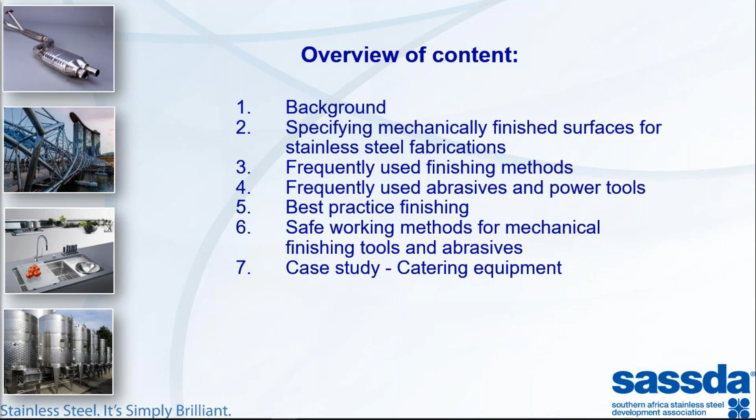What we see when we look at stainless steel is just a function of the light frequencies reflected back from the surface. This means the light source, whether it's the sun, your LED light, or candle, is important. The surface size matters too—there's a vast difference between a full sheet in the sun compared to the same surface finish on a business card size under electric light. And then also the surface condition of the material. Those three things are the key factors.

When we look at customer specification, usually in the title block of the drawing there's fine print specifying some sort of RA surface roughness figure. But this alone is not sufficient to fully specify the mechanical finish on stainless steel. The RA values might be the same, but the visual effect might be different. And in practicality, how many fabricators have the ability to measure RA values, and how many of those specifying it can actually measure it when they receive it?

When the aim is to precisely match the specified finish to what you can deliver, the best approach is to use comparative surface finish samples or swatch samples. This is important—a visual benchmark. So what you do is figure out what surface finish is required, give it your best effort that you know you can repeat in your fabrication setup, and then get approval from your customer. Once that approval is there, either side can have a sample of this finish that they use in the quality departments. It saves a lot of headaches.

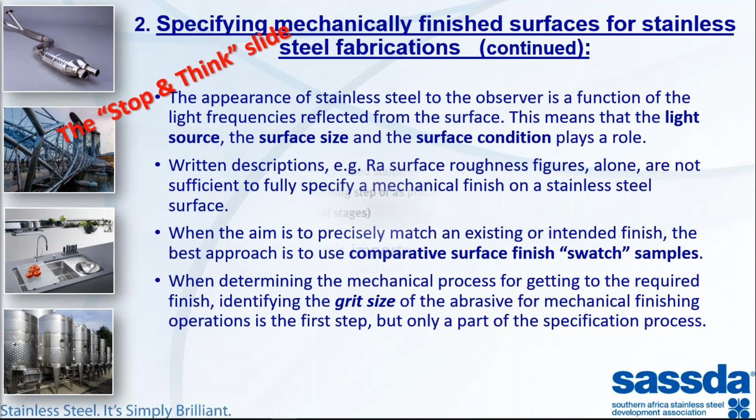When we talk about grit size and specifications, these are normally the grit sizes we work at for different processes. Removal of weld seams is around 40 grit. For hot rolled material, 1D finish with that orange peel effect, we also start around 40 and move up to 60 grit. Cold rolled material can start at 120 grit, or down to 80 if needed. As you go through finishing steps towards a final, very fine finish, you use 120 up to 240 grit, and final polishing stages go up to 400, even in some cases up to 600 grit. So the choice of grade of material is also important when you want a very smooth or highly reflected polished finish.

The chemical composition is important here, especially on tubular products. Many of these grades are alloyed with some titanium, like grade 321 and 316Ti. This gives the material excellent resistance to intergranular corrosion, but when you finish it to a high degree, it leaves a streaky or uneven look to it. You learn that quickly once you've tried to do a finish—I think a lot of people have burnt their fingers that way listening today.

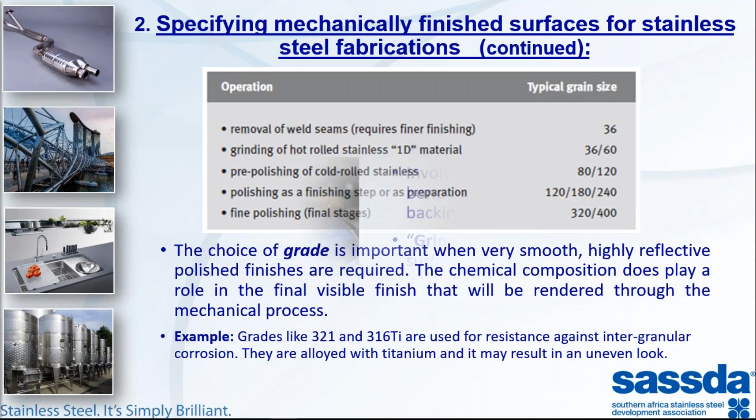Okay, so let us look at the finishing methods. Let's kick off with grinding and polishing. This is a mechanical method of removing layers of material from the surface with an abrading action. It involves hard particles glued or bonded on a backing, which then moves at speed and at specific pressure to remove the upper surfaces of the material. Grinding usually refers to the removal of surface finish, such as weld seams and oxide layers, and is in most cases regarded as the more aggressive removal. Polishing is more for decorative work, where the surface is also intentionally removed, but less aggressively so.

Now, after we've got that nice polished finish, we can shine it up even more by buffing. Buffing is not a process intended to deliberately remove material from the surface, but rather a smoothing process, just making the material more bright. You'll know it well—the cloth wheels used as indicated in the picture. The process can involve the use of pastes, liquids, and even solid buffing compounds of different abrasive values—we also call them soaps. That's rubbed or applied to the cloth wheel, and then it enhances the finish.

The fine finish produced is dependent on the pre-buffing stage, so you can't just take the buff wheel and put it on mill finish or hot rolled mill finish—it will only shine the dimples up, basically. Buffing can be done in single stages or multiple stages, with different grit sizes, and it's usually done in stages where the direction of each stage differs from the previous. We'll look at that later. This is a type of finish usually used by pharmaceutical companies—that type of specification, and some architectural products.

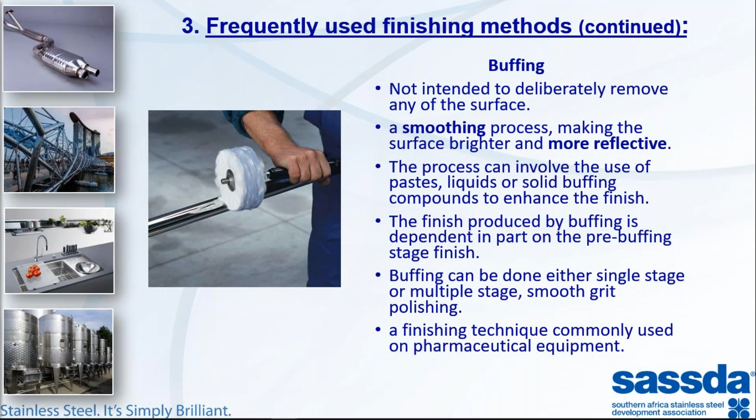Brushing is sometimes confused with polishing, but they're different things. Polishing is removing material, less aggressively than grinding. Brushing is not intended to do that, but it's also an abrasive finishing process.

Milder abrasives are usually used to only texture the material, changing the surface conditions so that light is deflected or reflected in a different way. Typically this will be a brush finish as indicated on the picture, using wire brushes and Scotch-Brite items, belts, pads, and wheels.

It's very important to use representative surface finish samples when specifying brush finishes. Your wire brushing might not look like mine, so we need to negotiate this and make sure we've got visual aids to assist us when doing the job.

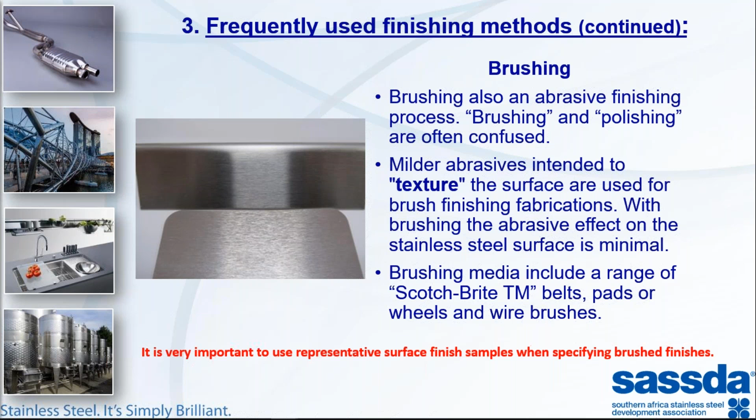What's important when we talk about the final appearance and quality of the surface? I'd say surface quality is more important than appearance, but the two go hand in hand. It's dependent on your abrasive type. Your backing material is very important because that gives you flexibility, removal of heat, and so on. Your grit size, shape, and hardness is important.

Then also the number of finishing steps - like I've mentioned, you can't go from a 2B to a mirror finish in one go. Then also the equipment and its power supply - we'll talk about the power supply just now.

And how the abrasive is supported, coming back to the backing type - if it's a belt or disc, what is the flexibility? Then, and this is where the operator's skill comes in, there's surface speed and applied pressure. We need to control both of these very carefully to have optimum lifespan of our equipment and abrasives, as well as getting efficiently to the required surface finish.

The optimum choice of finishing equipment, consumables, and method will depend on the existing surface finish. If it's really close to the final finish, you'll go for faster equipment, less pressure, finer grit sizes, etc. The accessibility of the areas is important, especially with your tooling, and then what the final visual effect must be.

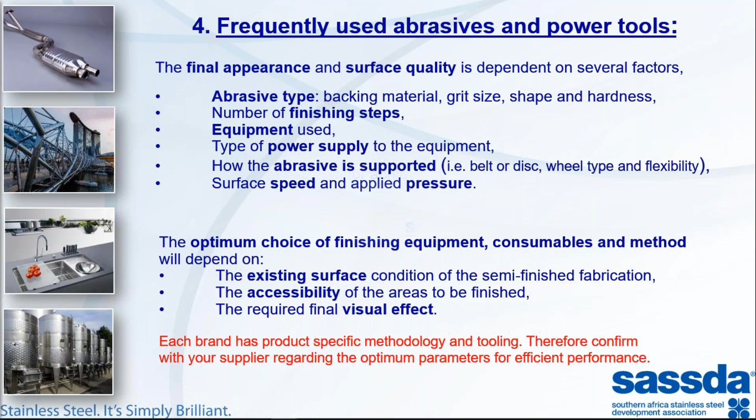If we look at some of the equipment and consumables we use, there's the abrasive belts - we all know them, different sizes, widths, grit sizes, backings, and you can even get them custom-made to suit your equipment. This is a very handy thing in your workshop.

Another abrasive, not as aggressive as the abrasive belts, is your Scotch-Brite and similar product range. We use this especially for blending in material. You can also get them in belts and wheels, but we use them a lot in manual operations in pad form. They're not graded in terms of grit - they're just called coarse, medium, fine, very fine, super fine.

This is the standard workhorse in our industry - the flap discs. This is usually used in the initial stages where you want high volumes of surface material removed. These things are a bit aggressive and they can bite.

For finer operations, you'll use the fiber discs, also known as sanding discs, or here in the Boland as papiertjies. It's less aggressive than flap discs and less prone to undercutting, but when you need to remove material, this is not as cost effective as the flap discs.

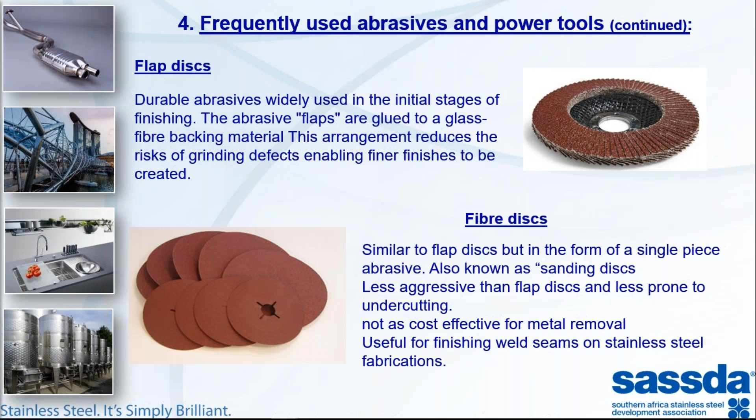There's also the unitized wheels. This is a Scotch-Brite looking type material, a nylon type of bonded material. We put it on mobile or portable machines, and you get them in various diameters, densities and flexibilities. These things last pretty long, and they're able to give you a uniform finish from the first action right until the consumable is finished.

It's especially popular where you've got long welds where you just quickly want to strip clean your welds and the heat-tinted metal. Convolute wheels, very similar to this, but formed by wrapping layers of abrasive around a hard core to make up a wheel. These things are less flexible, but also less aggressive. So for both of them, because they've got a small contact surface, please be careful with your speeds and pressures that you apply.

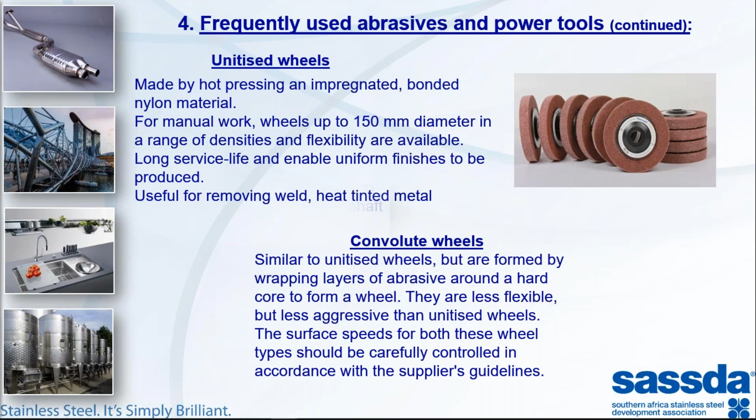We will have a look at some of the popular tools, and the first lot is the fixed tools. On this combination picture, you will see the old workhorse there in the middle, the fixed belt grinder, suitable for deburring things and sharpening drill bits and all kinds of general work.

There's the flexi polisher. It looks like a Dremel tool on steroids there at the front, at the bottom. So it's a fixed machine, but it's got a flexible shaft, and you can do quite arduous in-shop polishing work with it.

Then on the right, there's the long spindle buffing mills. There you can put on there anything from a stone to a grinding stone to cloth wheels. Also, you will find one of these things in all stainless steel shops. Then you will also see where they do a lot of tubing, the tube notching machine, and it's used to prepare joints for pipe intersections, etc.

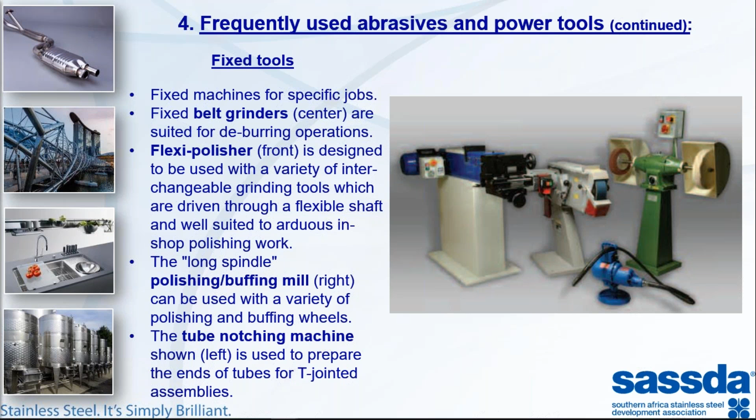This is where we get to the portable tools, and these things are the workhorses of the industry. So the first one you see is a portable grinder. You don't see them that often, but they're multi-purpose tools and you can use them on plate as well as tube. You can put all kinds of easy to change abrasives on there.

That one has got Scotch-Brite on, but you can even put an inflatable wheel to give you different hardnesses and flexibility of your abrasives. Keeping the speed down on this guy because it's quite aggressive, can avoid excessive heating. You see it's quite wide as well, and it will limit surface damage. So your pressure and your speed should be in good balance, but low speeds.

You get the old angle grinder. This is a very popular tool, DIY and in industry, and you know how they work. They work on flexible abrasive discs. Usually these things are very versatile with all kinds of things that can be fitted to it, and it's good for both grinding and polishing.

This is a handy tool, also not that often that you see them. The internal angle finishing tool for cabinets and things like that to remove weld marks. So this is a very thin disc, and it's also versatile for grinding and polishing.

Tube polisher, this is a very efficient tool, and the main feature is that it's got a belt that is mounted on flexible wheels, or the physical mounting is flexible, so that you're able to wrap the abrasive close to 270 degrees around your tube. So for blending in and finishing off tubes, very, very efficient.

Very similar to that is the power file, so it's just narrow. It's a pneumatic tool, and it's good for deburring and grinding off weld seams, but it can give uneven surfaces. It's fairly aggressive. It bites.

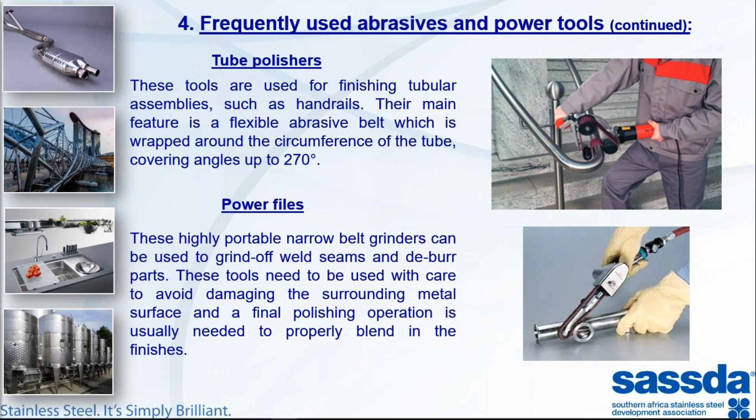The drawback on the pneumatics is the higher energy cost. Obviously, you will have to fork out some money to get your compressors and your air lines in, and then your tooling is also a bit more expensive, and then you sit with very high noise levels. But they're efficient. The electrical or stationary machines, the fixed ones with flexible shafts, the limited shaft length can reduce your accessibility, and then a high level of operator skill is also needed here, and we don't always have that.

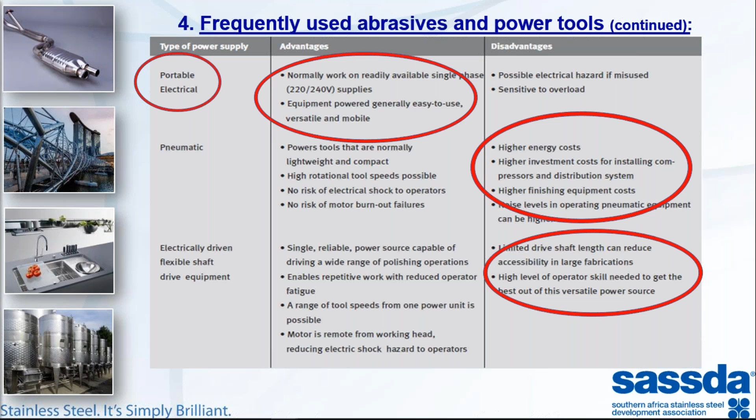Okay, so now we get to the stainless steel part of things. Best practices when we work with stainless steel. Now, the best way of saving cost and time in your finishing department is by minimizing the finishing. So it's important to purchase material that's in a good condition and as close to that final finish as you can get it. So it's usually very good to negotiate with your supplier or with your customer to accept the standard mill finish.

Protect these high value finished components throughout all stages of manufacture and storage. This is where one of those courses of ours, the shop floor courses, can assist your storage and your storeroom people. Then also the correct welding procedures and equipment is important.

When it comes to high quality finishes, the TIG welding method is unbeatable. But remember, TIG welding is slower than MIG or stick. So you might save on the polishing, but you will spend more time on the welding. Once again, it's a cost decision you've got to make, how you will balance it.

And then obviously avoid excessively thick weld seams. Not only is it going to take long welding those things, but it's obsolete material that needs to be removed.

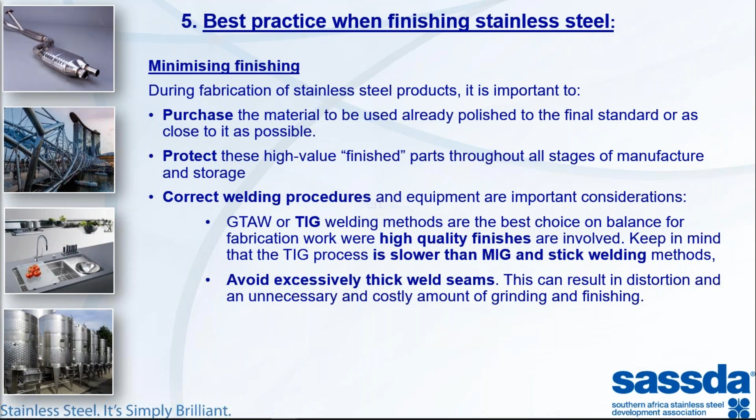A bit of an example of how we can select finishing methods appropriate to the design, or the other way around, design to fit or to make it easier to finish. On the left, we've got what's called a soft tube joint, where we use a standard preformed elbow that we cut at the right angle, and then only two straight joints are needed. It's good access for both welding and finishing.

On the right, there's the miter joint. It's a sharp angle, and therefore your accessibility to the inside for welding and cleaning off is restricted. In both cases, you will finish it off manually with a Scotch-Brite type of consumable.

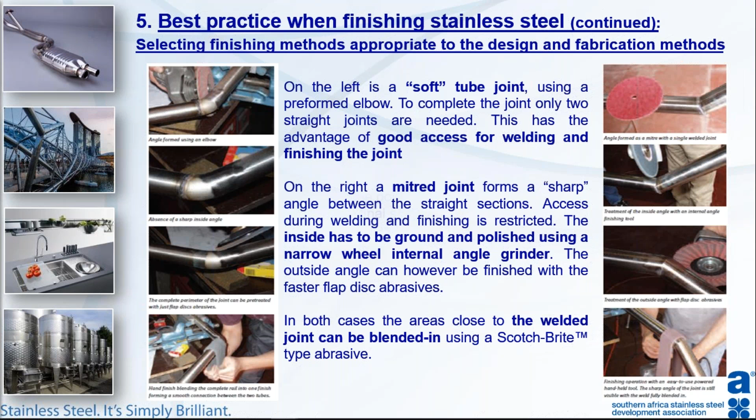Okay, so for industrial finishes, it's usually the weld areas and so on that get finished, and corners get deburred. But when we are talking about decorative finishes or hygienic finishes, some precautions must be kept in mind.

You must keep your surface dressing to a minimum. Every little nick or bump or heat distortion will reflect the light in a different way, and it will always be visible whether you polish it or not. Avoid localized heating. Work with the existing polish, grit and direction that's on your material as you buy it. So keep your heat input as low as possible, not only in your welding process, but also in your finishing process. Once again, a function of speed and pressure.

Increasing your tool speed and pressure will get the job done quicker, but you will have a high turnaround in tools, and your cost in consumables will escalate. And when you change your grit sizes, from 180 grit to 240 or whatever might be the case, clean off the workpiece, blow it out with air equipment to make sure all those large grit particles are gone. When you blend it in, keep the same polish direction all the time through all the stages. And when you do the hand polishing, use a long stroke in the final stages.

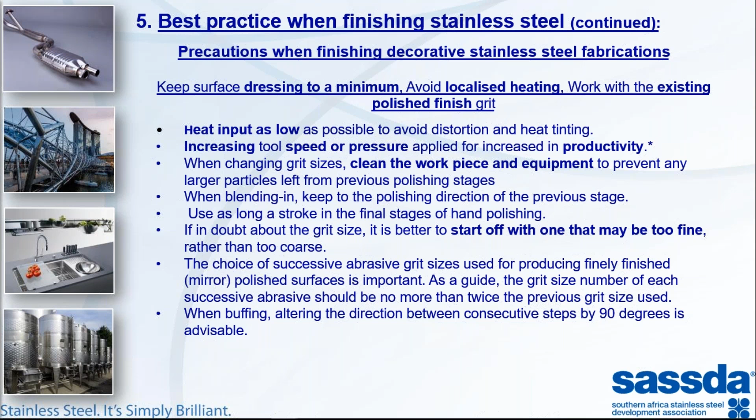So, like in any stainless steel shop, whether it's industrial, architectural, or for high-spec industry, good housekeeping during storage, fabrication, finishing, and installation is extremely important. The laser film, that PVC coating on your sheet metal to protect the surfaces, is important. Keep those coatings on as long as possible.

Try and get your tubular deliveries, your square tubing, your pipes and so on, in plastic sleeves. Please do not, and it's such a simple thing but we still see it quite often, keep your abrasives segregated. Do not mix abrasives used on mild steel at all. If possible, you must separate your storage areas and, if possible, also your working areas, even if it's just a curtain type of divider, just to make sure dust does not float around.

Dust is our main enemy in the fabrication areas. And once again, pointing out of course, care must be taken during storage and handling to avoid damage and contamination. I think we underestimate the amount of damage to material during storage and handling.

When we use lifting equipment, you might use a dog clamp on mild steel equipment, but you can't use it on stainless steel equipment. You usually have to protect it and put some sort of non-metallic material, cardboard or something, in between when lifting stainless steel with mild steel equipment. Work tables are normally also designed to facilitate work on stainless steel, so they're clad with a thin inert layer, a wooden layer, hardboard, cardboard, something like that.

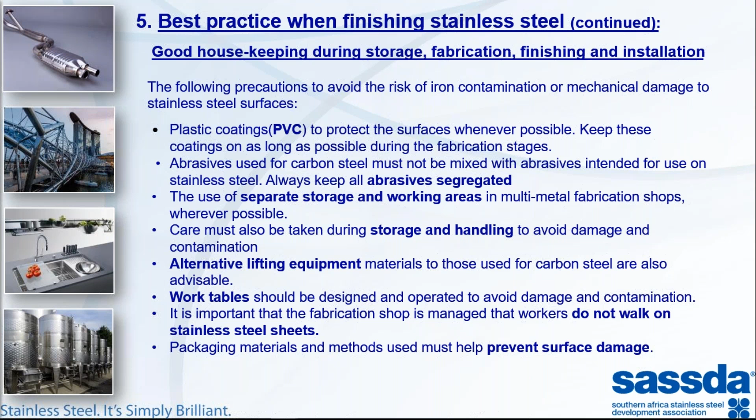And then obviously, right at the end of it, our packaging materials and methods must help us to prevent any surface damage during transport and delivery. The same care must be given during installation work, obviously.

Safety also remains an issue, and I don't think I have to tell you any more about it, except to inform you that there's moving and rotating parts, and these parts are covered with abrasive material. These abrasives are also sometimes prone to fragment and fly all about the place, so safety glasses, that type of thing, is important.

And then once again, the dust and grinding fragments - please clean your workshops and make sure that dust is extracted. There's vibration, and you've got to be aware that especially the pneumatic tools are quite noisy, and these things create heat.

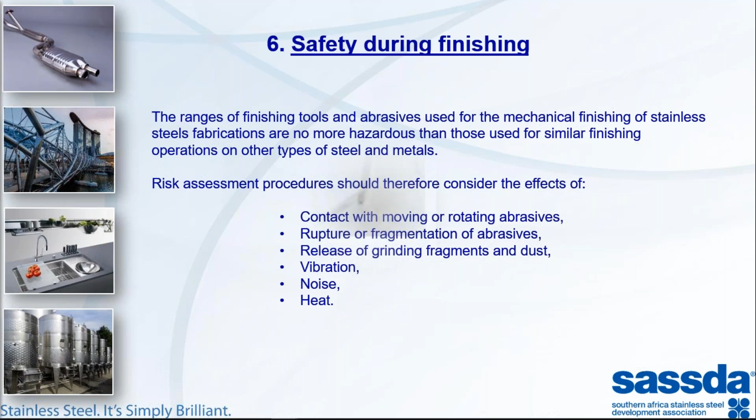So finally, so that you can go on with the rest of your day, let's have a quick look at how this double basin sink unit was made for the catering industry, and how they use this knowledge from the previous sections to limit damage.

So there you will see the frame has already been made, welded, and some of the sheet metal components on. It's all protected with the PVC coating, and that recess, then the two holes in the top, must be very carefully cut for minimum burring.

In the old days, they used to do it with nibblers, and then they had to deburr. Nowadays, that's why we've got laser cutting and NC methods of doing things.

Even the bending is very important. So once we put the drop-in bowl in, there will be a good joint to render good welds that will require only minimum material to be deposited during the welding process, and then it can be easily cleaned off to the correct hygiene standard. And there at the bottom you see a punching machine.

The PVC remains on as long as possible. On the bending side, the top tool does not create a lot of damage.

It's actually the two lines made by the V block at the bottom, so you will keep your PVC at the bottom. There's also a strip that you can put on your V block.

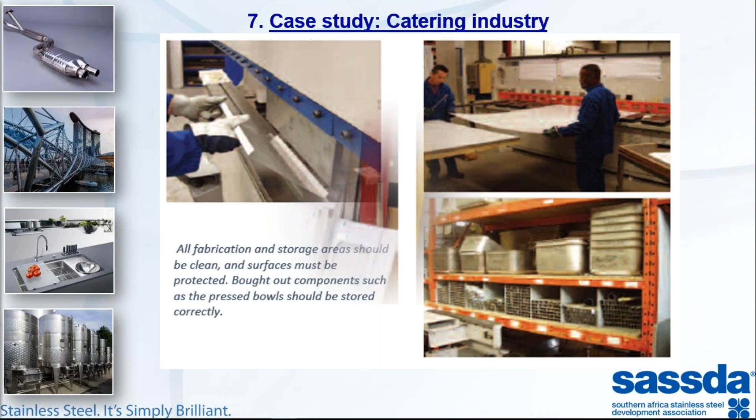Look at the storage, used trolleys - those things are all PVC coated, completely stored upright. You see there's barriers next to the tubular products as well. It's protected and safe.

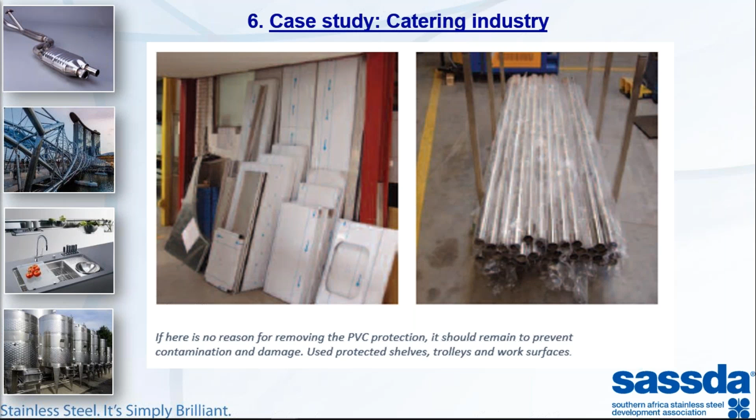So now once they drop the bowl in, the PVC will be removed in the area where we will want to weld. Your artisan, his workmanship comes in now. They will have all kinds of custom-made clamps and things to get a proper fit.

They will then start, and this is where the correct procedure for welding comes in. They will start to tack weld this in, but small tack welds, with lots of them, to minimize distortion. And then it will be welded up to smooth these tacks down.

They will also use copper bars, backing bars, aluminium backing bars, to extract heat from that weld zone to minimize the heat input, as we discussed.

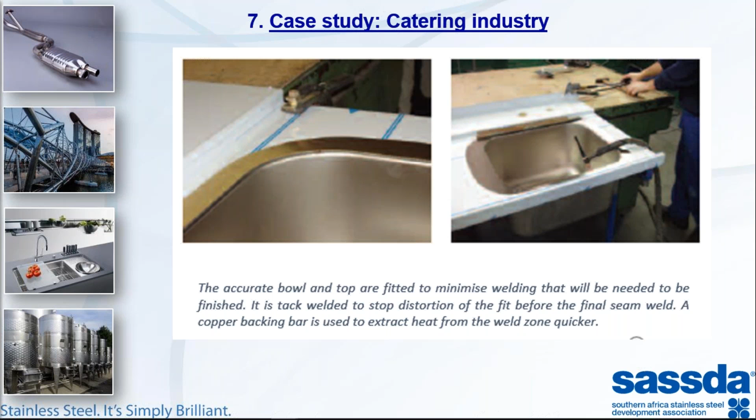So then once it's welded, the area can then be smoothed down through grinding, and then it can be finished to a high standard of corrosion resistance and the hygiene requirement, usually with a papiertjie or sanding discs.

And then with smaller rotating tools, you can get the round, the radius on the top, and get it nice and smooth. The final action is a manual action with the Scotch-Brite pad just to blend the surfaces and the different finishes in.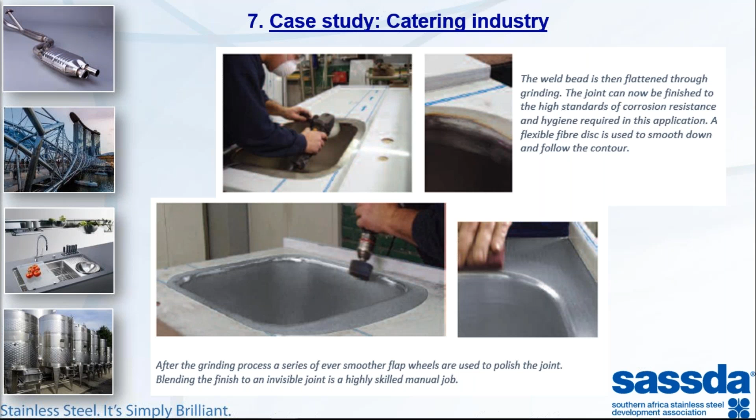The same applies for the press brake work, and now this starts at designing already. The component will be cut with a bend relief recess in the corner so that you get a perfect fit up of the two little flanges.

These things will then also be tacked lightly and then welded as close as possible to autogenous, one without filler material. These things at the corner would be fused and then worked off and blended into the correct specification, and the PVC will be put back.

So right, there you've got your finished product, and after removing the heat tint at the bottom, this piece of stainless steel is quite valuable - not only because it's complete stainless steel, and stainless steel is valuable, but because of the skills and workmanship that was put in there.

So it's only proper now to protect it even further after the pickling or the passivation process, wrapping it, packaging it properly, and storing, delivering, and transporting it correctly.